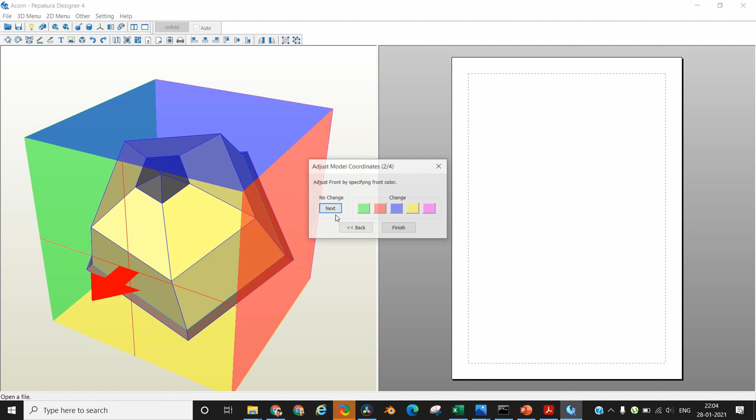When you first upload your 3D model, the actual dimensions of your model are displayed. In my case, it is 19mm by 20mm by 19mm. But 19mm is a very small height. I want it to be at least 10 centimeters high, which means it has to be 100mm. You only need to change one of the dimensions, and the other two will automatically get adjusted.

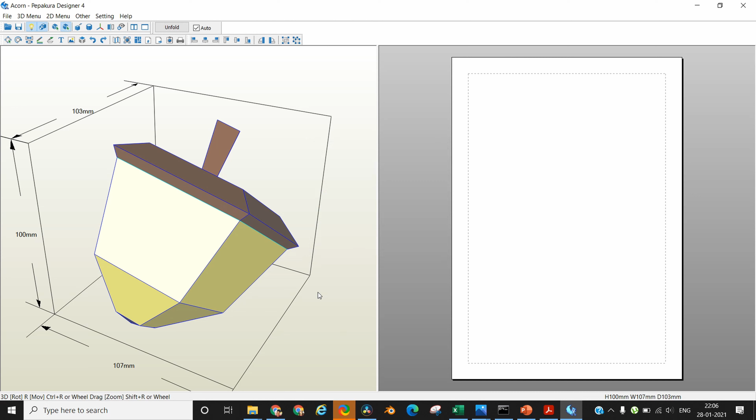Now, while you are developing your template, you figure out that you don't need a 10 centimeter high model, you want to build a 20 centimeter high model instead. In that case, after loading, if you want to change the scale, you need to go to Settings, click on Change Scale, click on Set Scale again, and then change the dimensions here, and your model will convert to those dimensions. Don't worry if you've already unfolded it and think you might not be able to change it now; you can always change it whether the model is unfolded or not.

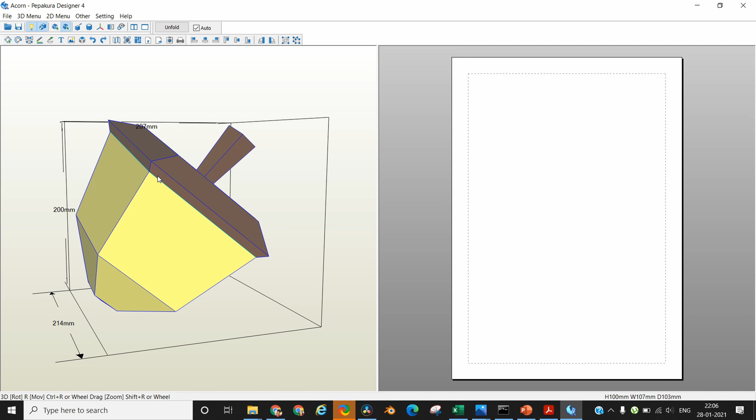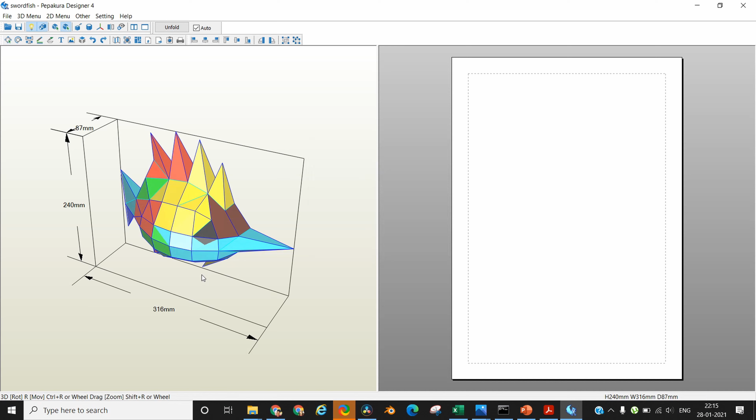Coming to the next question: can I remove the color that comes with the 3D model, and is it necessary to arrange parts by their color? Here is a very colorful model of a fish that I developed in Blender. As you can see, there are multiple colors involved. So the first question was, can we switch the colors on and off?

Yes, you can switch on and off the colors if you are planning to build the model in a single color. What you need to do is click on this button, Set Materials to Faces, and it will switch off the colors. Now you don't need to worry about the colors, and you can simply distribute the model as per your convenience into 2D parts. But what does it help if you keep the colors on?

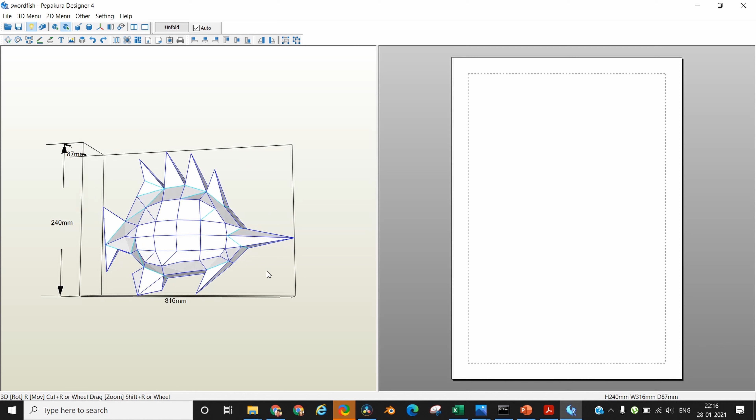First of all, if you are planning to build a colored model, it's actually a good practice to keep the colored parts together. It helps when taking a printout, especially if you are printing directly on colored paper. It also helps the Pepakura Designer to club your colored parts together.

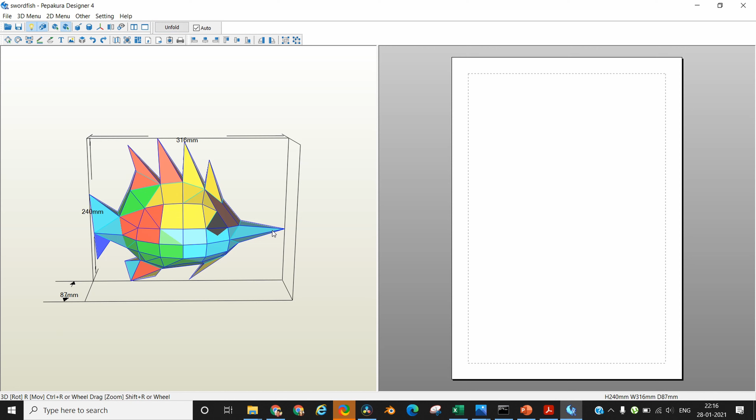For example, if I keep the colors on and unfold it, you will see that the majority of the colors will be grouped together. It's quite possible that in some cases colors might be mixed, but in most cases similar colors will be grouped together. As you can see, all the yellows are together, while the blue has been separated. This blue isn't completely separated because of the design of the model, but in most designs you'll see that colors are properly separated.

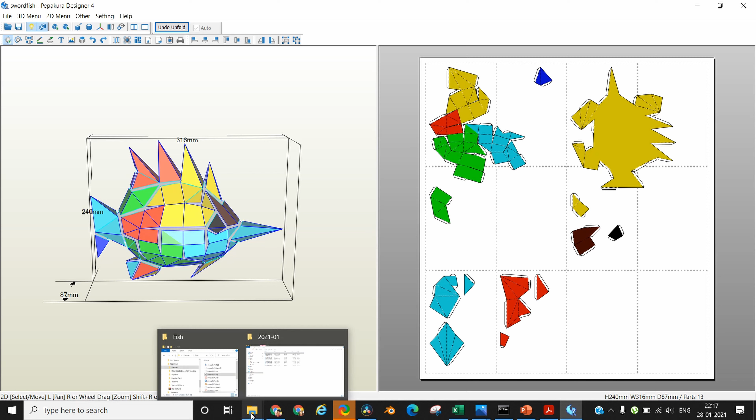So what I will do is load another very colorful model, which will help you visualize that in most cases, if you leave the colors on, you will be able to get a colored layout properly directly from Pepakura, and you won't need to do too much arrangement on the 2D template.

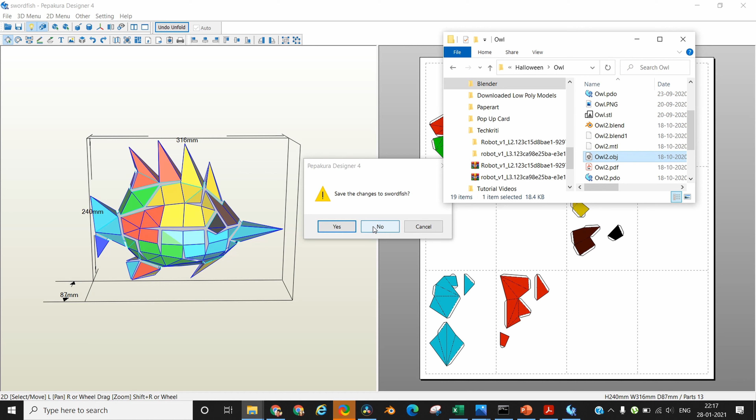So let me just load it and do an automatic unfold. As you can see, all the blue colors are together, all the gray has been separated. Then you have the red separate, green separate, and all the colors are separate from each other. No single part has a mix of two colors.

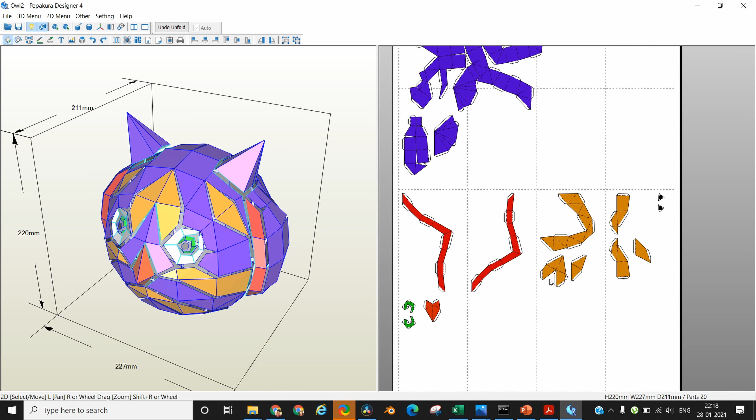And that's the beauty of this software. If you specify the colors in your model itself, it will automatically separate as per the color layout of your model. And if you're planning to sell your template to other users, it's actually good practice to put parts of the same color together on a single page, so the person doesn't need to waste colored paper and can take the printout directly on the colored paper for that particular section.

Next, a lot of people have asked why do I put so much text on the templates, and is it necessary to number the parts? No, it's not necessary to number the parts.

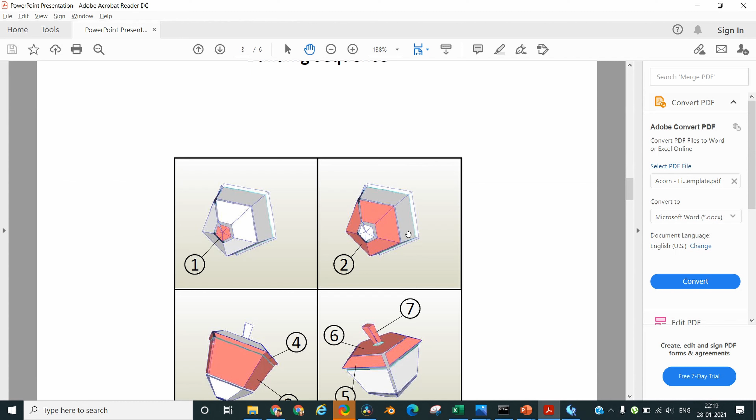So I will open one of the templates that I have. This is one of the simplest templates I have, it was the first model that I built. It only contains a total of 7 parts. So for a model as simple as this, you don't actually need a numbering sequence, but it helps if you number your parts. A person who is not so good in building these models, it actually helps these kind of artists to start on their journey of papercraft.

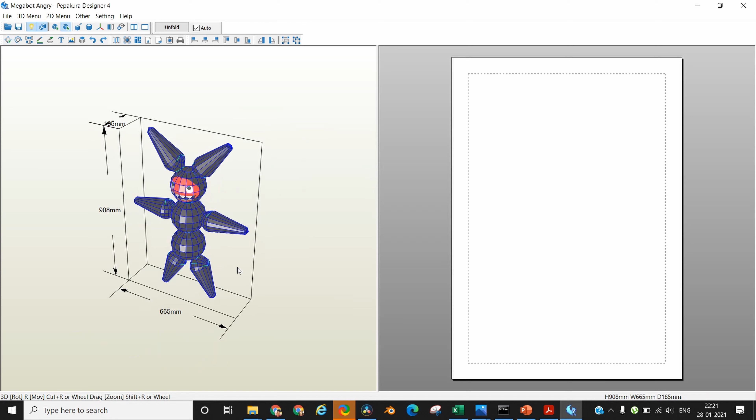Next question, are cut lines necessary, and how to reduce time in marking the cut lines? Now this is a Megabot model that I built, and you can see that there are a lot of parts. If I leave it up to Pepakura to divide this model into different 2D parts, you will see that the distribution the model does is very complex, let me show it to you.

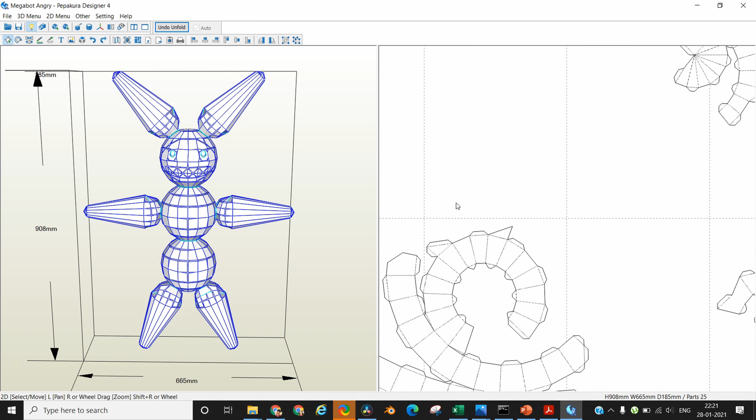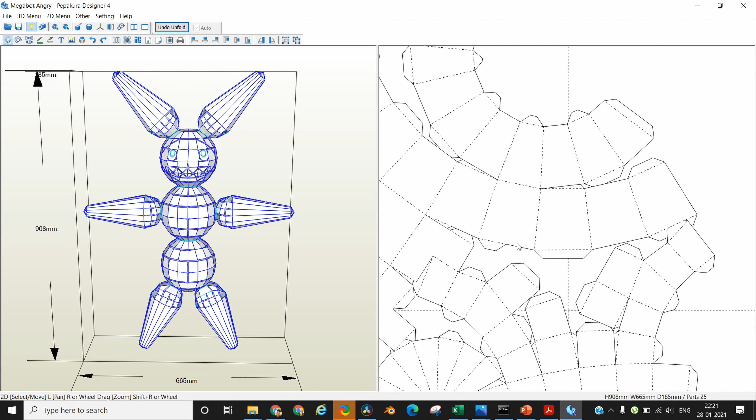Now if you look at these parts, let's take an example here. This is one single part, it's completely connected. If I take a look into this particular glue flap, these glue flaps, the ones you see on screen right now, are so small that when you are actually going to build the model, it will become very difficult for you to paste the edge and the flap together.

So it's important that you tell Pepakura where you want your divisions to be, so that Pepakura can divide your model accordingly. That means you need to tell Pepakura, kindly divide my model here. How do you do that? You click on this specify cut line edges, and now wherever you click, the lines will become orange. That means Pepakura is now going to place a cut here. So if I want these to be divided, I need to specify each edge.

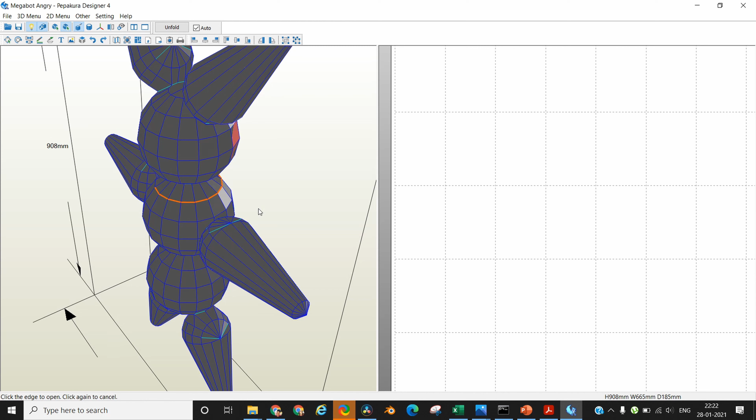But this seems to be a very time consuming task, clicking on each edge, making sure the orange lines are there for Pepakura to know it needs to cut here. So there is a shortcut to it. What Pepakura allows you to do is that if you double click on any edge, all the adjacent edges either in the horizontal, vertical, or diagonal direction will automatically get selected.

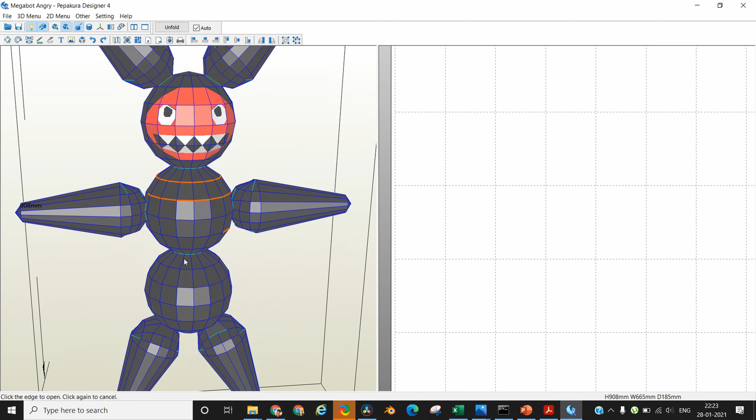What I mean is that if I double click here, all the edges are getting selected unless there is a division in between. So to show again, the entire circle is selected. You can see, and I don't need to click on each edge again and again. Similarly, if I click on a vertical edge, all the combined vertical edges will get selected.

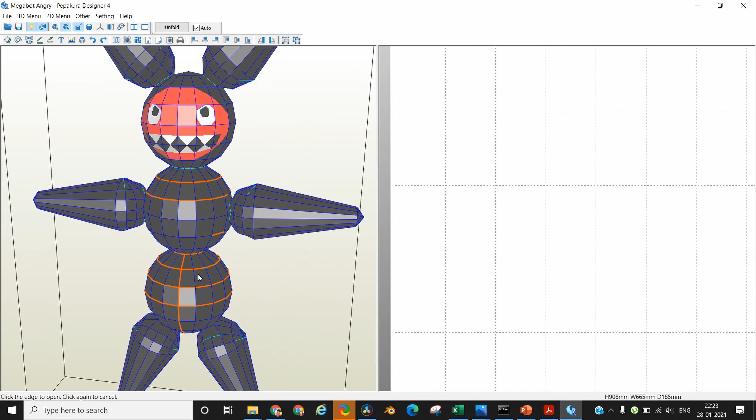Next question somebody asked was related to, can Pepakura also create files for 3D printing? And this person asked me if it's possible to remove the glue flaps and the fold lines from the model. So the answer is yes, you can do that. To remove the fold lines, you need to go into settings and then click on other settings. Under the line style, select none for the mountain and valley fold, and then click OK, and all the fold lines will be gone.

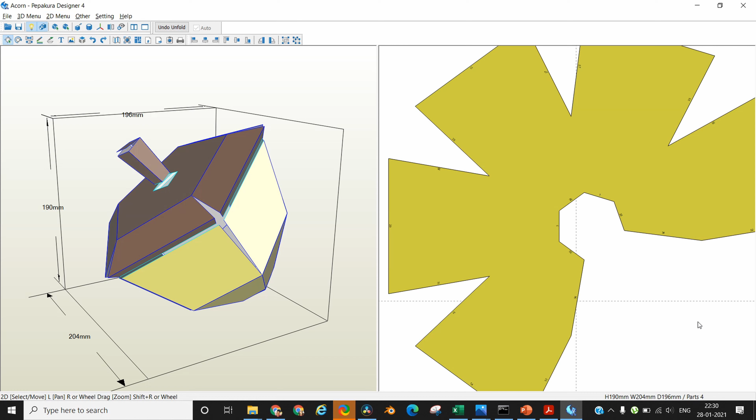So this is how you can remove the fold lines. To remove the glue flaps, all you need to do is go to the 2D menu and uncheck the option show flaps, and the flaps will be gone. And now your model is without any glue flaps and without any folding lines.

Next question is how can I arrange more parts on one page? Let me try to arrange pieces on a single page. Let's see if it is possible for me to arrange all the pieces without overlapping with each other.

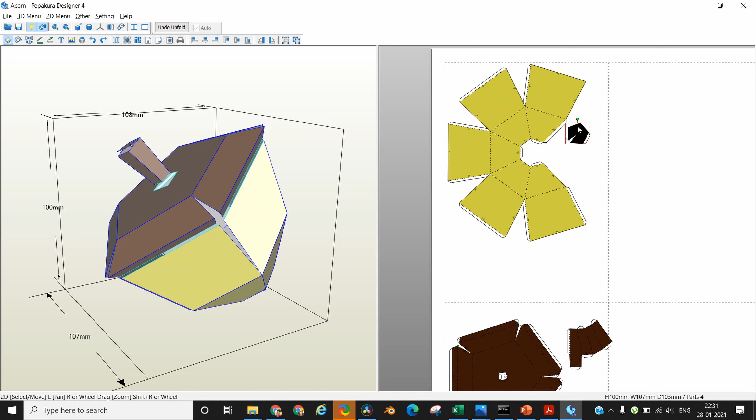But this one piece I cannot arrange without overlapping with the existing pieces. So what can I do to put this piece on this page only?

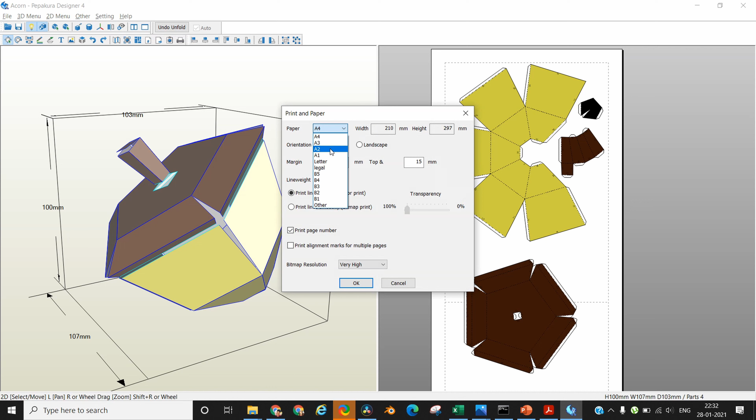All you need to do is change your print and paper settings. By default this page is A4 size. If you make it A3 size, under settings go to print and paper settings and select A3 paper, all of a sudden you will have more space on the same page. This helps you arrange more parts on a single page. This also means you'll need to take a printout on A3 size paper so you can build the model to the exact dimensions.

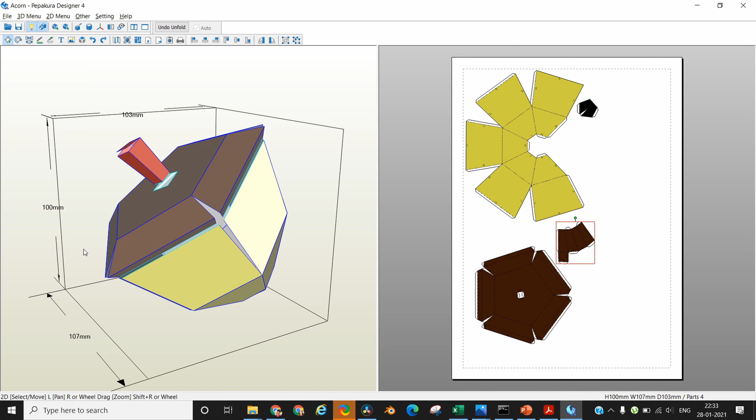If in case you use the A3 size print and paper setting and you take a printout on A4 size, then your model will definitely not be 100 mm high. It's going to be smaller than that. So this is another way of changing the size and shape of your output model, either printing on a larger scale of paper or a smaller scale of paper. That's how you can arrange more parts on a single paper.

Next question, how do I find parts in a complex model? After you have done the 2D rendering of your 3D model, sometimes it becomes difficult to locate the 2D parts in the 3D model. So there is a very smart way of doing it in Pepakura. Let me show you, here is a very complex model.

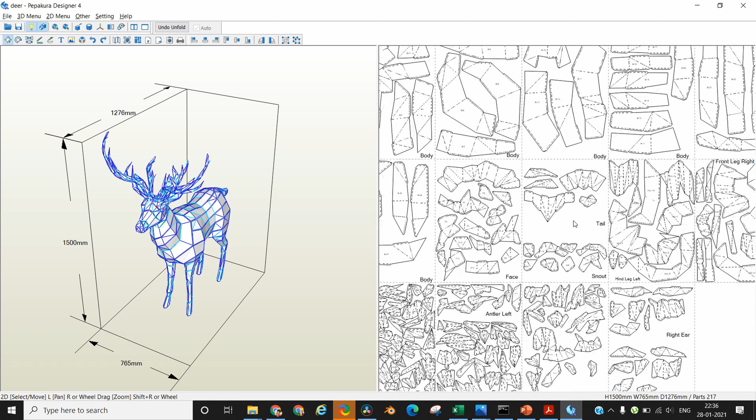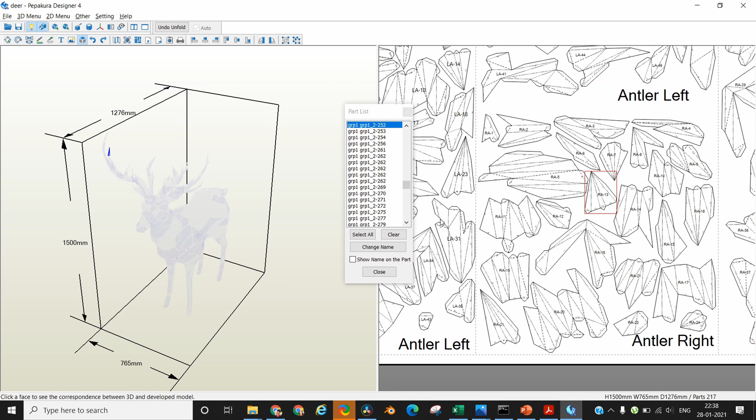You can just tell by the number of parts that are there in the model. And if you click on a part, it will not be easy for you to locate that part. Now I want to see where this part is, so I'll press Ctrl K on the keyboard and wait for the correspondence window to appear. What the correspondence window helps you to do is select a particular part. So if I select this part, the rest of the model will get grayed out and only the part you have selected will be visible. This is the part that this particular piece was referring to.

Similarly, if I click here, this allows you to see where your part actually lies within the 3D model. It's actually a very good way of understanding how your division has also happened on the 3D model.

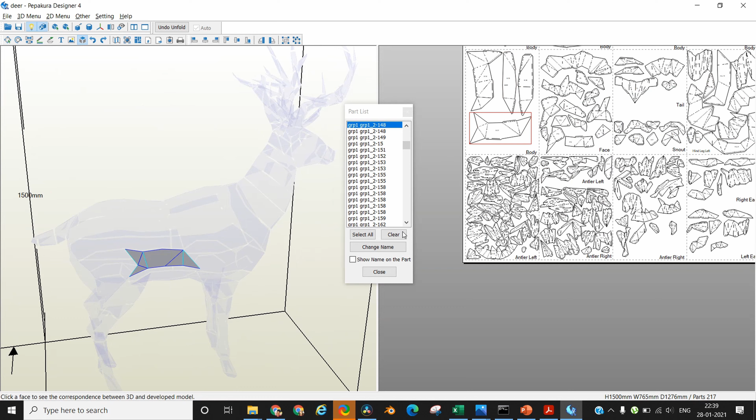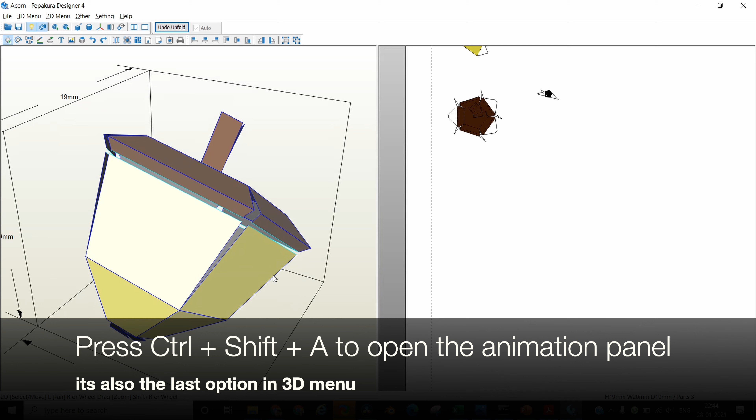Next question is understanding the folds of your 3D model. Pepakura actually provides animation of your 3D model, converting it into a 2D model and vice versa. So let's see how that works. It will help you understand the entire animation process and how the folds are working, where parts are getting folded, where parts are getting glued together. It will help you with that. Now let's see how the animation will work for this simple model.

In case you're not able to understand how a particular fold is going to work out, whether it's going to be a valley fold or a mountain fold, even after the folding lines, I think it's a good way of understanding how your folds need to be. This helps in understanding the folds in your 3D model.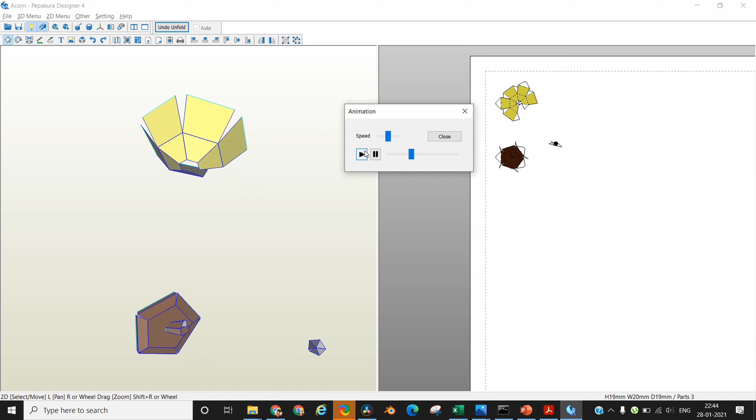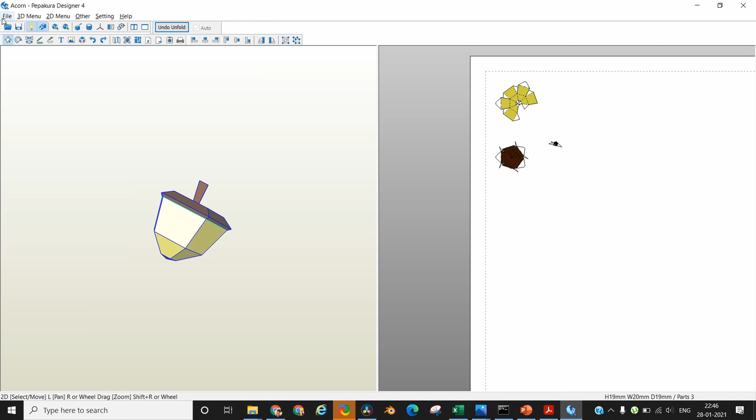Next question, can we create files for 3D printing? Yes, you can create files for 3D printing, the software allows you for that. For that, you need to click on the file menu, go into the export submenu, under that go into the vector format and click on DXF files per sheet or DXF formats. This will allow you to create your files and you'll be able to utilize those files for 3D printing also.

Next question is a tricky one and requires a slightly lengthy explanation, even though the question is very straightforward. Will numbers and lines be visible after assembling the model?

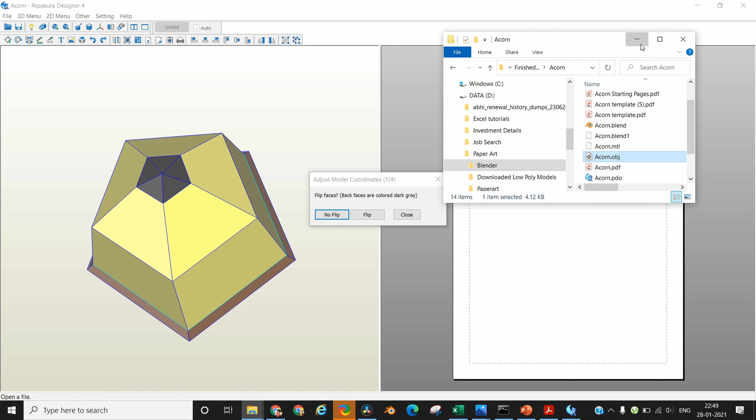The answer to that question actually depends upon one of the key steps you take when loading the model. Whenever I'm loading the model, we always get the first choice whether we want to flip or we don't want to flip the faces. Normally we'll select no flip, then select the front and bottom faces, then select invert or no invert, finish, and select our scale.

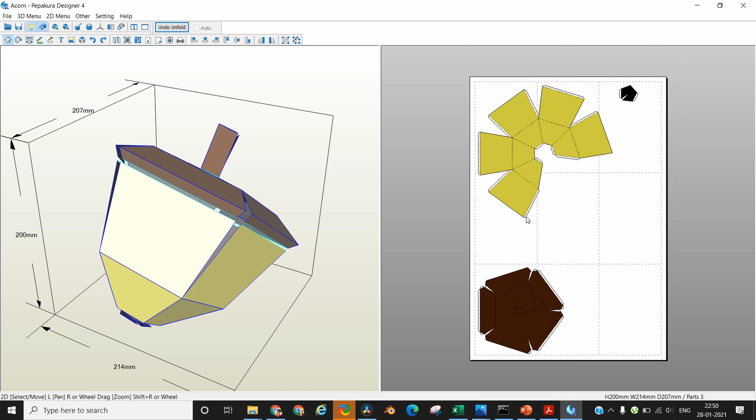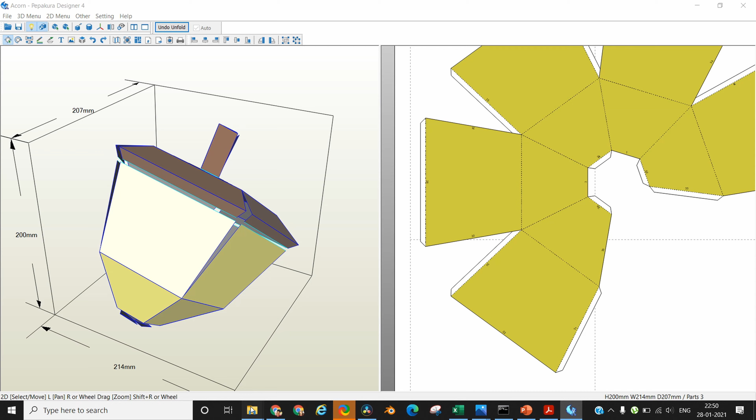Now when I have clicked unfold, the upper side that we see on the 2D parts is actually the underside of your model. What I mean is that all the numbers and everything present here, all the text and everything on top of this part is going to go inside the model. So if you have taken a printout on a colored sheet of paper, you don't need to bother whether there are numbers or folding lines present on your model. It's all going to go inside, and on the outside of the model you won't see any of those things. But this entire situation changes when you select the flip option rather than the no flip option.

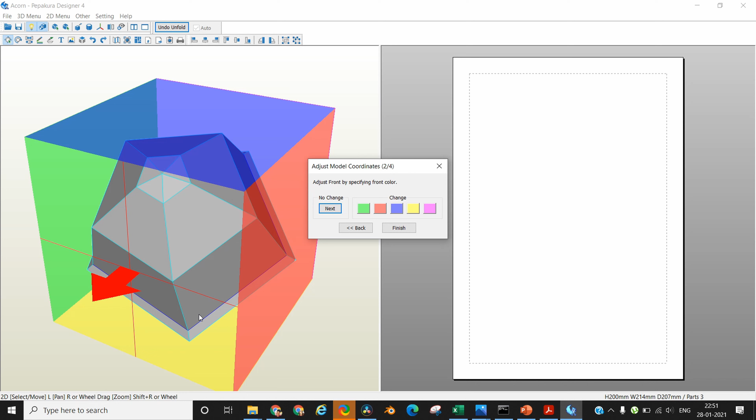Let me just reload. The moment you select flip, the faces are turned over. That means the colors have now gone inside the model and the non-colored faces have come out on the outside of the model. Everything else remains the same.

Now when you unfold, the colors that you see on screen are basically the outside of your model. So if you are going to cut it and paste it, all these folding lines and numbers and edge IDs are going to be visible. There is nothing you can do about it.

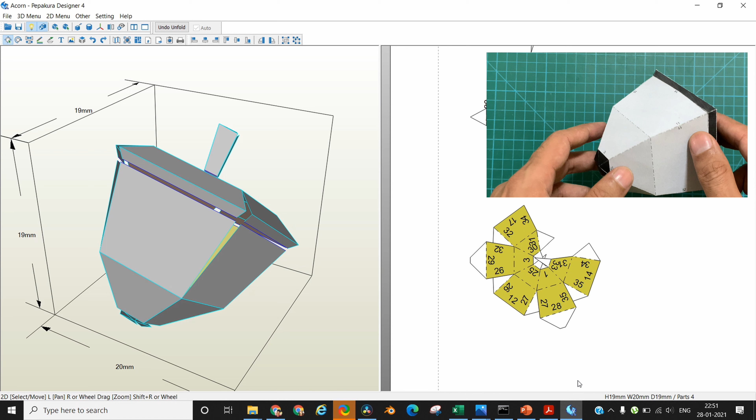If you see in my hand, this model that I developed with this template, you can see that all the numbers and all the edges are here. It doesn't actually look good because you don't want to see the numbers and text on the models you are developing. So what's the next step you can do?

The next step is, first you can remove the edge IDs, but then it will become difficult for you to understand which edge to glue together with what flap. So basically you will need to keep the model open in front of you all the time while developing it on paper, and it's going to take you a lot of time.

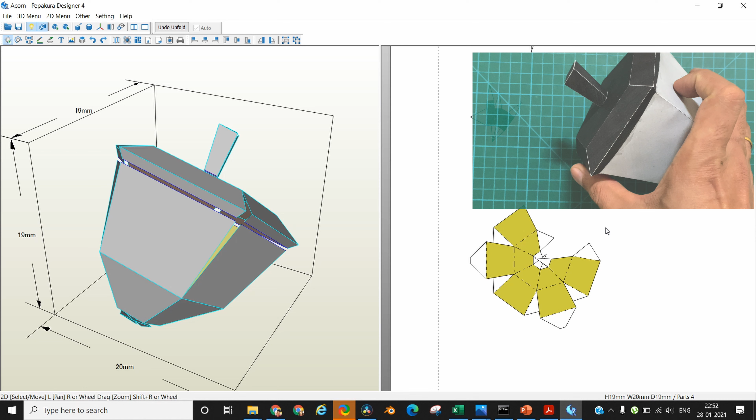In the normal model with the no flip option, when I developed this model, it hardly took me 15 minutes to complete. But when I developed the one you see right now in my hand, both are from the same flip template, but in one case the numbers are visible and in the other case the numbers and lines are not visible. It took me again only 15 minutes for this one, but for this one it took me almost half an hour, double the time. And this is a very simple model, it only contains 4 parts.

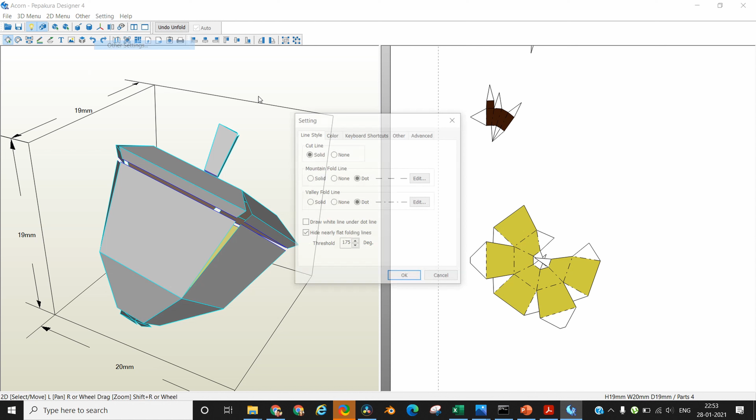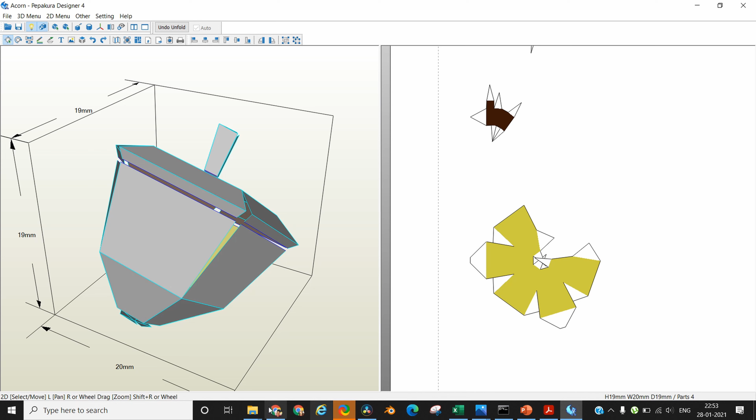And in case I go ahead and even remove the lines, it becomes even more difficult, because now you don't know whether you need to make a mountain fold or a valley fold. So while the options are available for you, you can always get rid of numbers, get rid of lines, and ensure you take a textured printout directly and connect the models. But then you will need to have the model in front of you all the time while pasting, and this will be very challenging if you are developing complex models like some of the ones I've shown you before.

And now the last question: how to quickly separate all parts individually? What I mean here is that you want to separate each face into an individual part, and this is done very quickly and very easily in Pepakura.

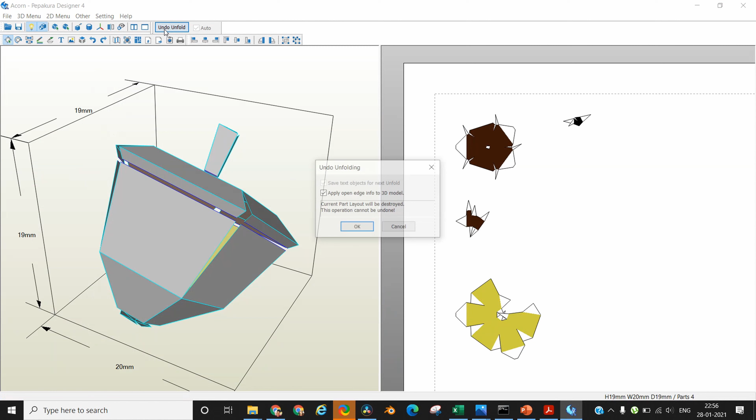So let me just undo the unfold. In fact, let me just reload the model again. Let me reload a slightly complex model. No flip, next, no invert, finish. Let's make it 240. I want each and every face present in this 3D model to be separated.

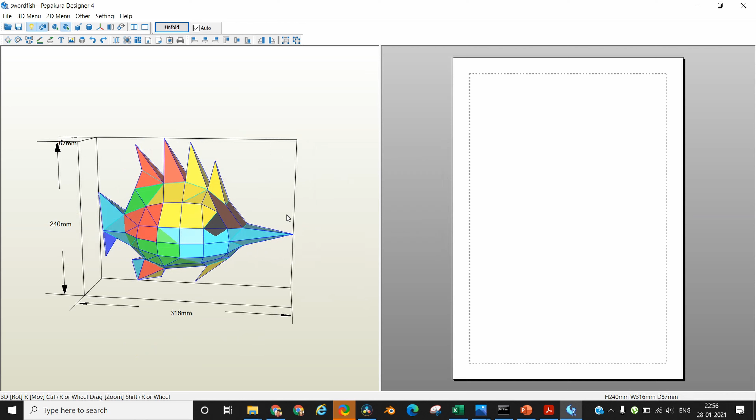So all I need to do is go to the 3D menu and select separate all faces. The moment you do, you will find cut lines corresponding to each and every face. And now when you unfold, it's not only going to separate all the faces, it's also going to group the faces by colors, so your job is much easier.

Now you need to number the parts accordingly and start connecting them. If you have a problem finding a part, you can always press Ctrl K, select a particular part, and it will show on the model where that part is.